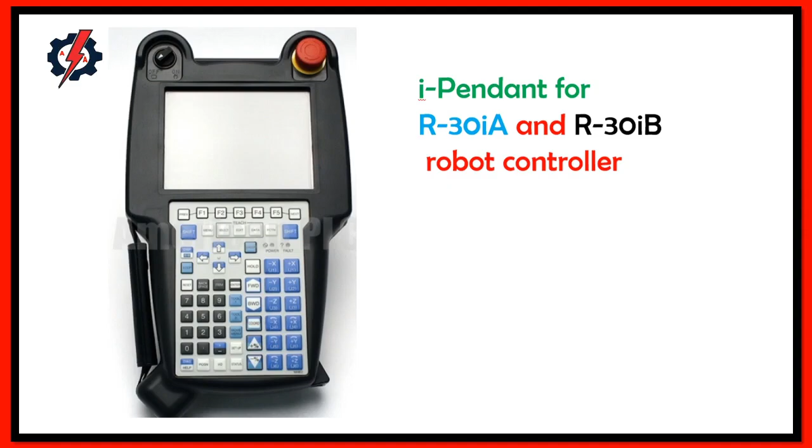This is the teach pendant or i-Pendant of R-30iA and R-30iB robot controller of Fanuc. Comfortable three-way Deadman switch.

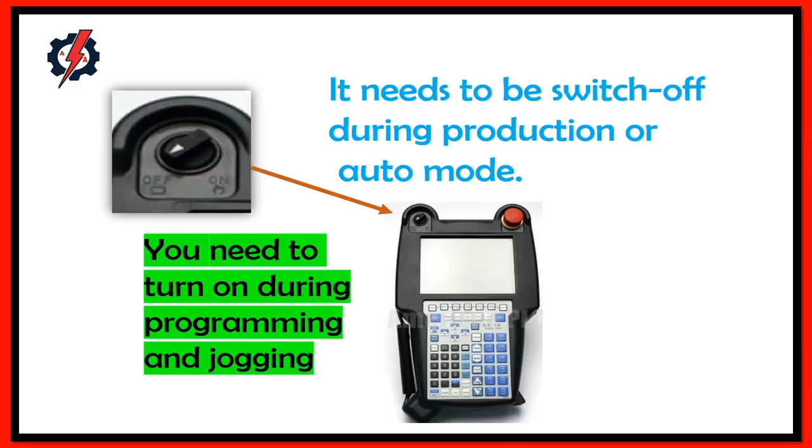It needs to be switched off during production or auto mode. You need to turn it on during programming and jogging. We have two e-stops built in, one in the controller and one in the teach pendant.

Two LED indications for fault and power. A fault has occurred and needs to be reset before you can run the program. Fault shows on the controller when powered on.

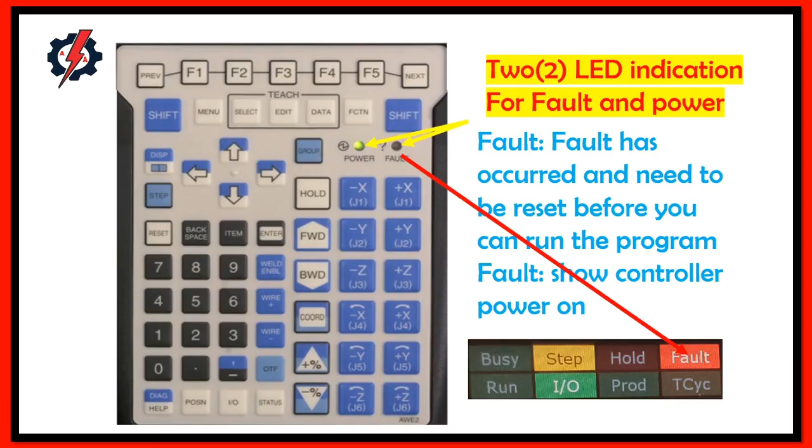Status indicator, for example, Deadman switch release, motion information, forward and joint, and speed override.

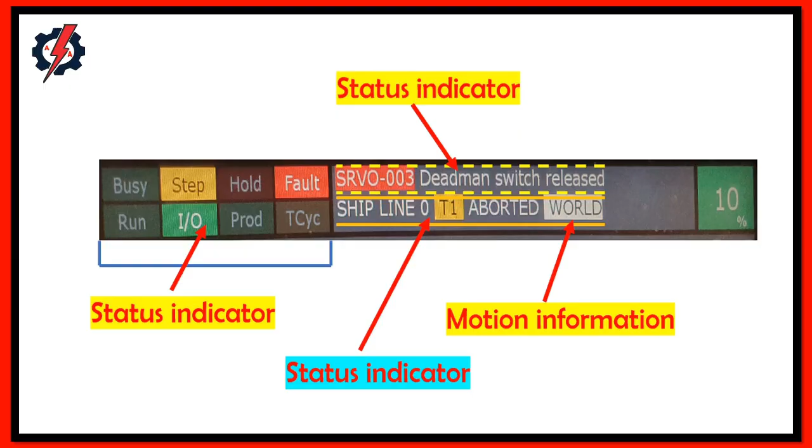We have a built-in USB port for backup and restore at the side of the teach pendant.

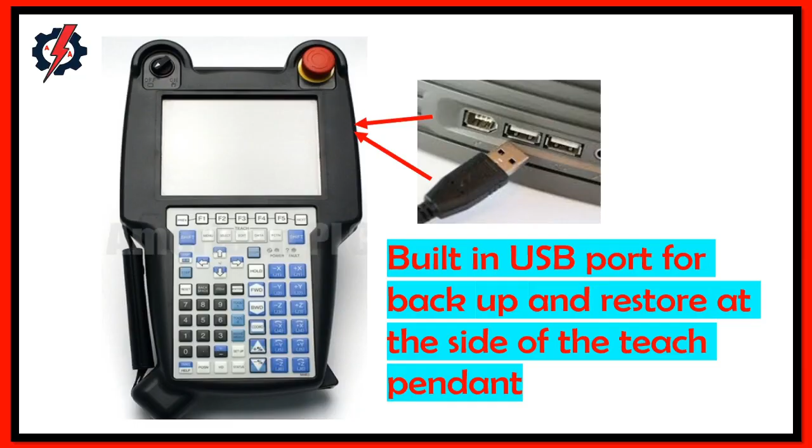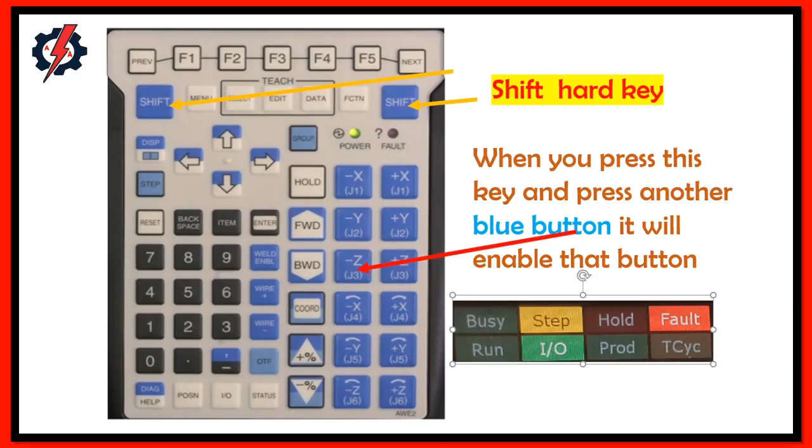Shift hard key. When you press this key and press another blue button, it will enable that button.

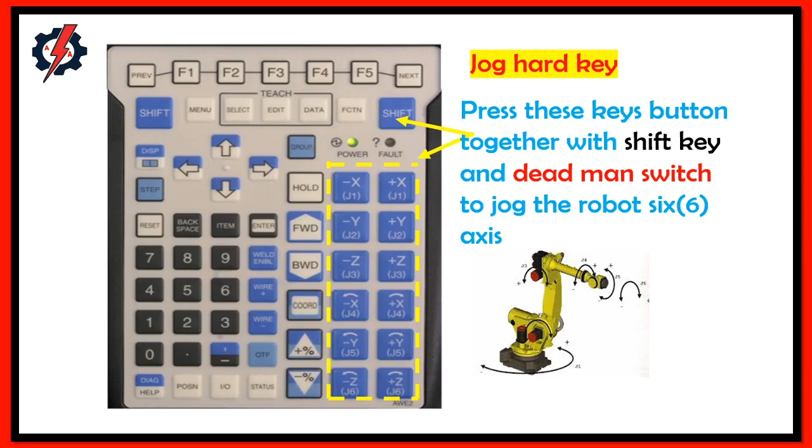Jog hard key. Press this key button together with the shift key and Deadman switch to jog the robot's 6 axes.

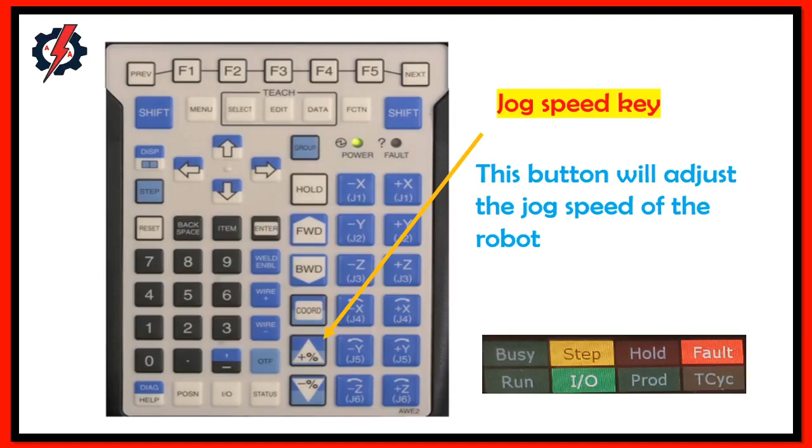Enable key for welding. This button will enable or disable the process.

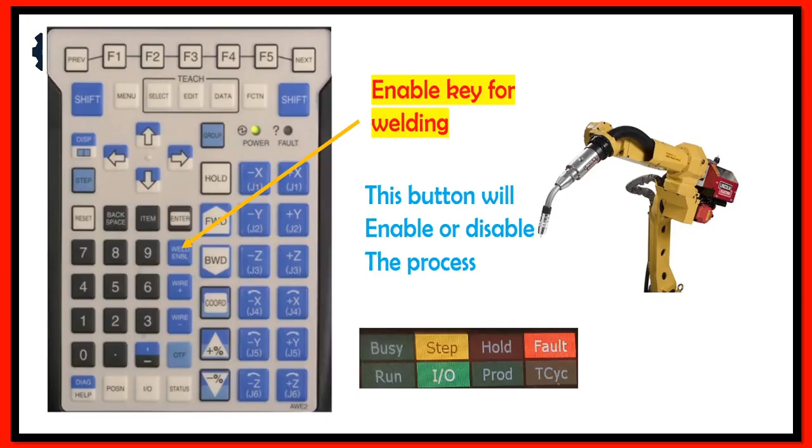Wire jog keypad. Wire feeding in and out of the nozzle.

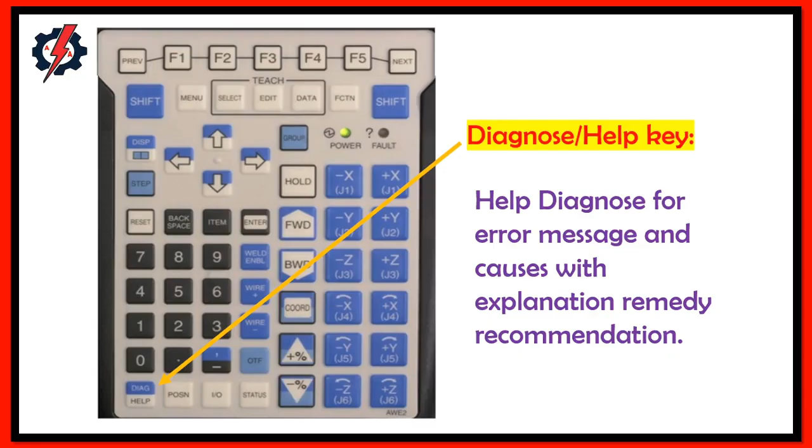Diagnostic help key. Help diagnostic for error messages and causes with explanation, remedy, and recommendation.

Display hard key. Press this tab together with the shift key to change from single to double or triple frames with extended status.

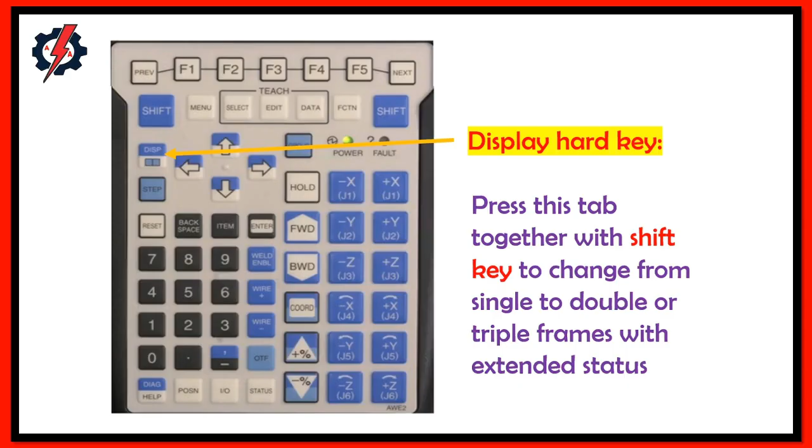Coord or coordinate key. Use this tab to select which motion instructions you want to use: X, Y, and Z, world, jog frame, or user frame, joint coordinate system, or tool coordinate system.

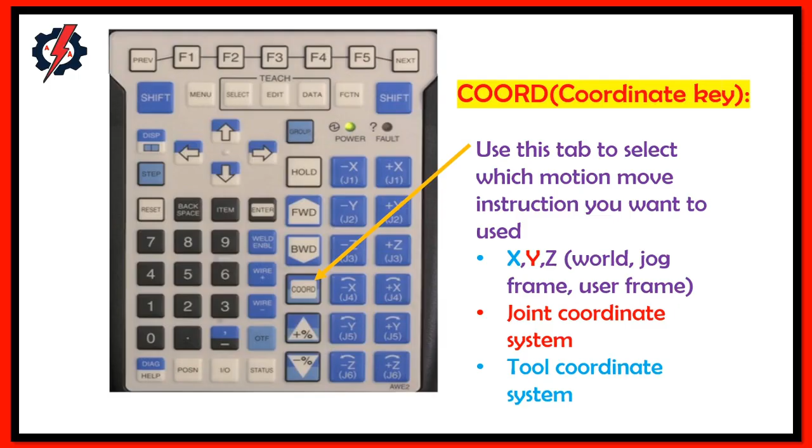Status hard key. Press this key to display welding status, showing real and actual voltage of welding and speed of feeding the wire.

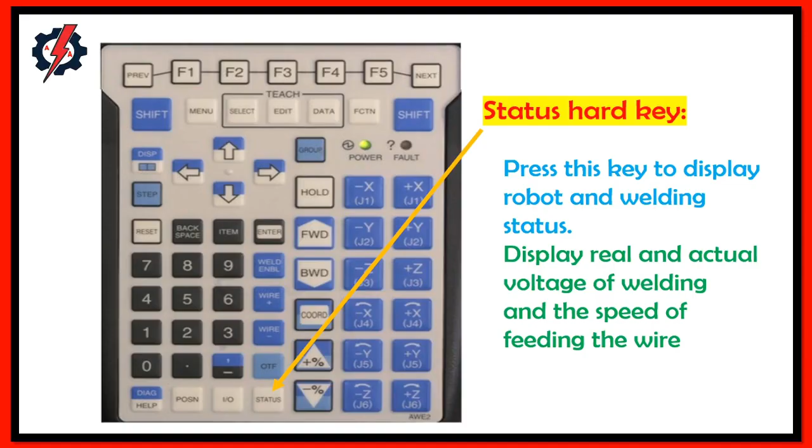OTF hard key. Use this key for on-the-fly welding to adjust parameters.

Input and output key. Use this key to display input and output of the robot controller.

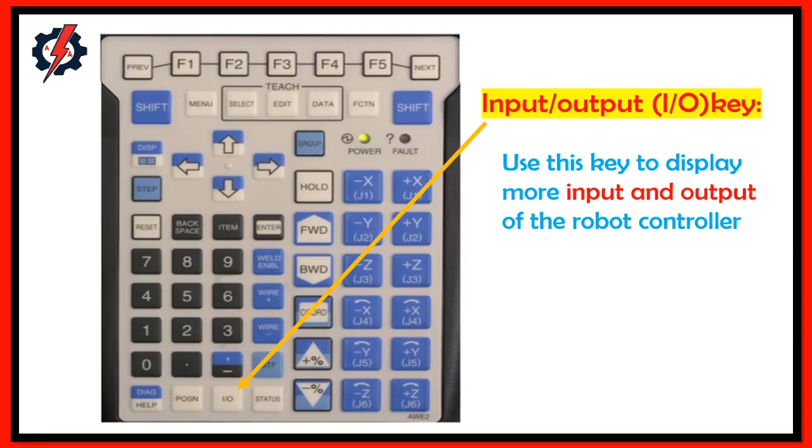The item hard key moves the cursor to a line whose number is specified. For instance, select a line on the teach pendant, press the item key, press the line number, and enter.

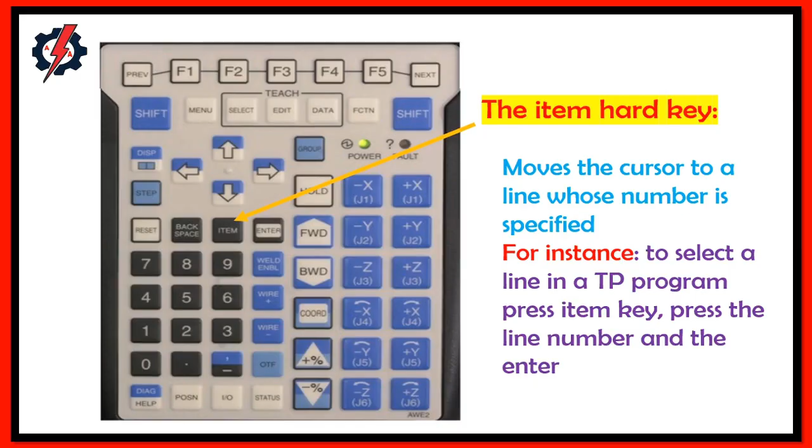The backspace hard key deletes the character or numerical value immediately before the cursor.

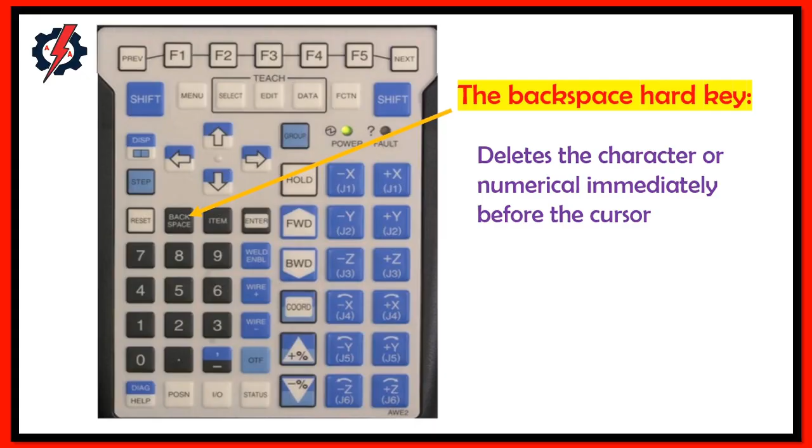Previous hard key restores the latest activity and displays the previous screen.

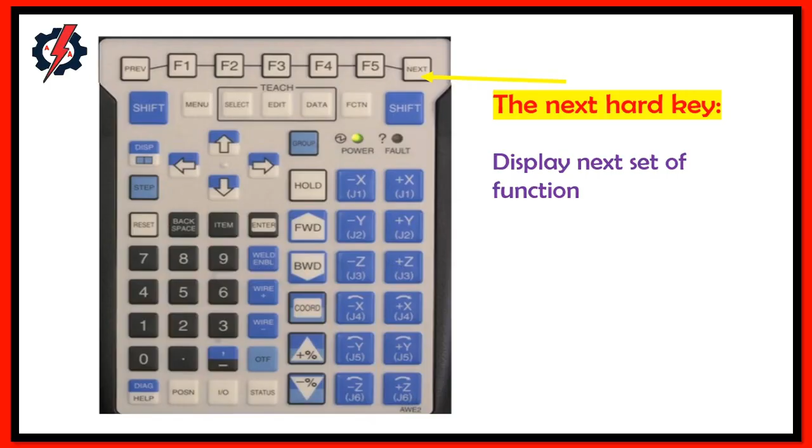The next hard key displays the next set of functions. Menu hard key. Use this key to display the menu screen.

The following list of screens are: Utilities, Test Cycle, Manual Function, Alarm, Input-Output, Setup, File, User, Select, Edit, Data, and Status.

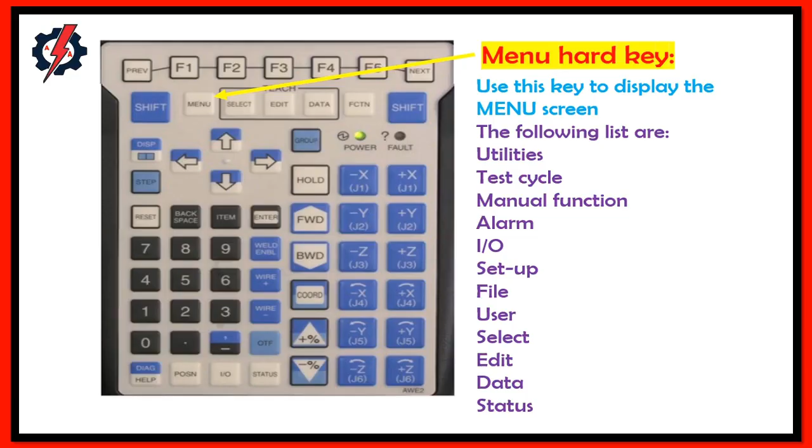Function hard key. Use this key for supplemental commands.

Examples: abort all, change group, disable forward and backward, change group, release wait, toggle coordinate jog, quick and full menu, save, print screen, unsimulate all input-output, cycle power, enable HMI menu, diagnostic log.

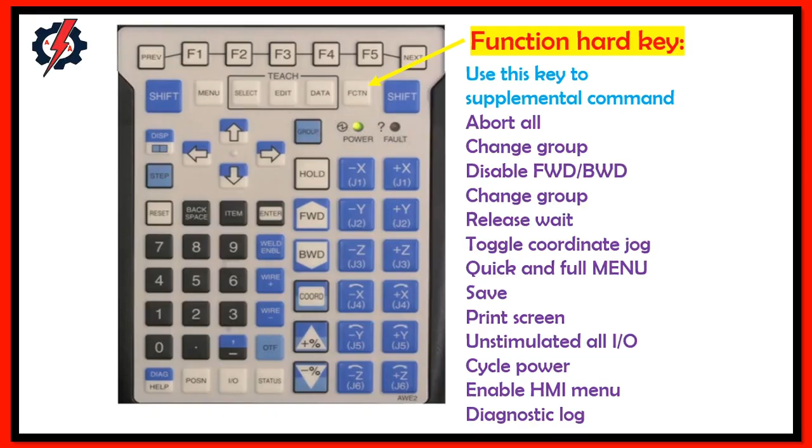Group hard key. Toggle the pendant between different motion groups.

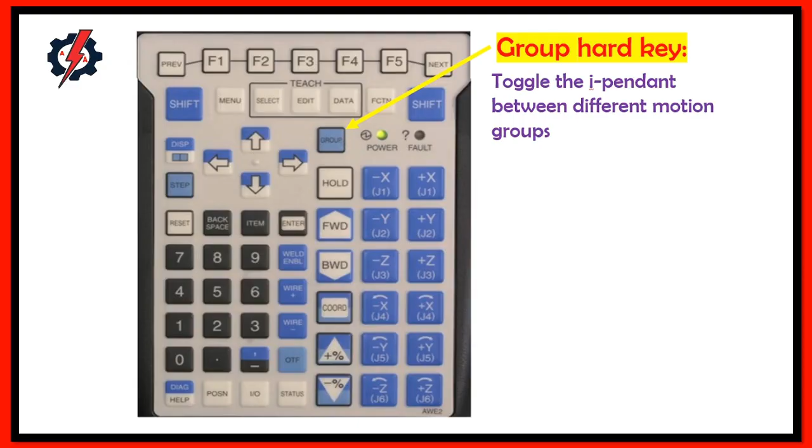Forward hard key. In production mode, use this key to start the program of the robot; in step mode, use this key for program statement execution.

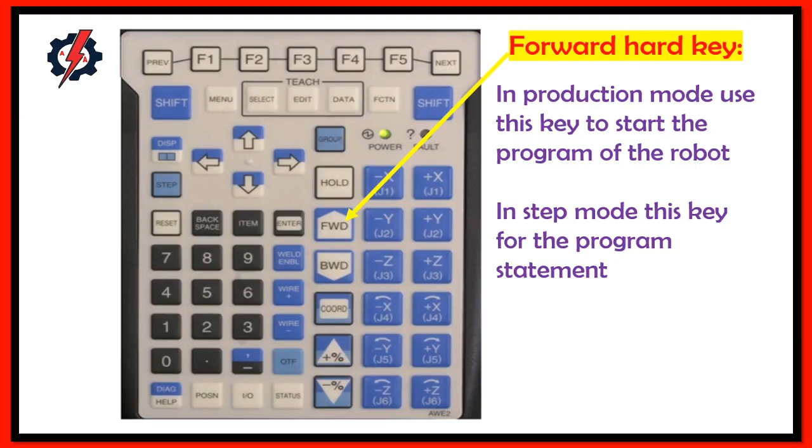Backward hard key. Use this key to execute the previous program. Hold hard key. Use this key to halt or stop the program.

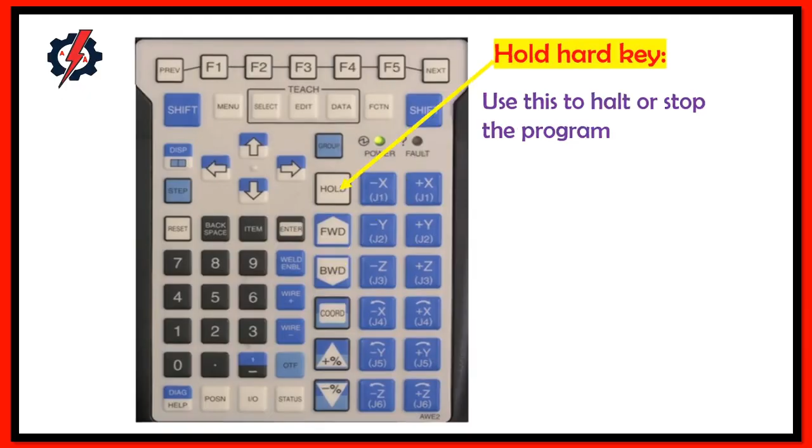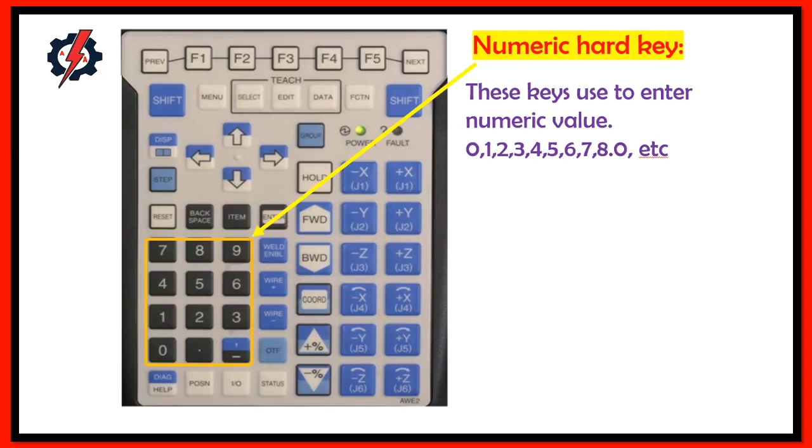Numeric hard keys. These keys are used to enter numeric values 0 through 9, etc.

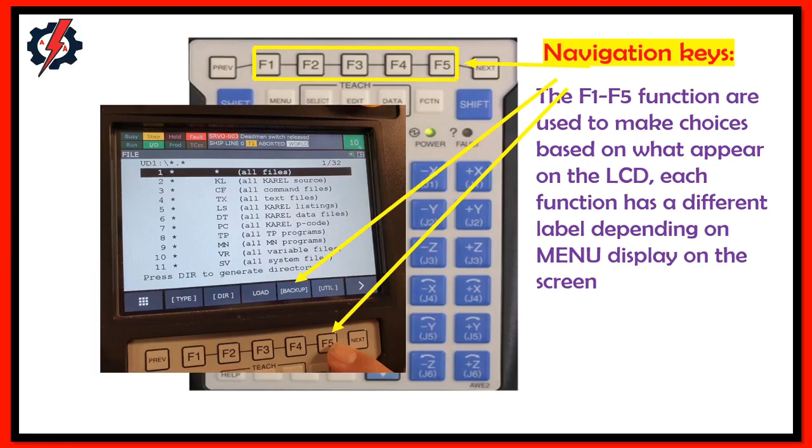Navigation keys. The F1 through F5 functions are used to make choices based on what appears on the LCD. Each function has a different label depending on the menu displayed on the screen.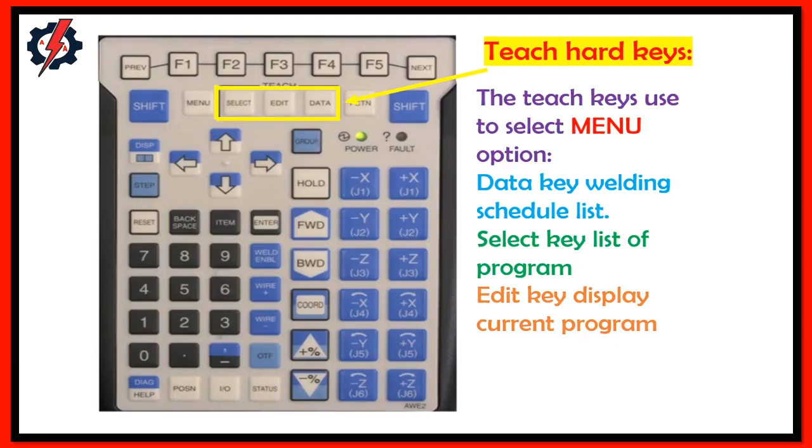Teach hard keys. The teach hard keys are used to select menu, data, welding schedule list, edit key, and display the current program.

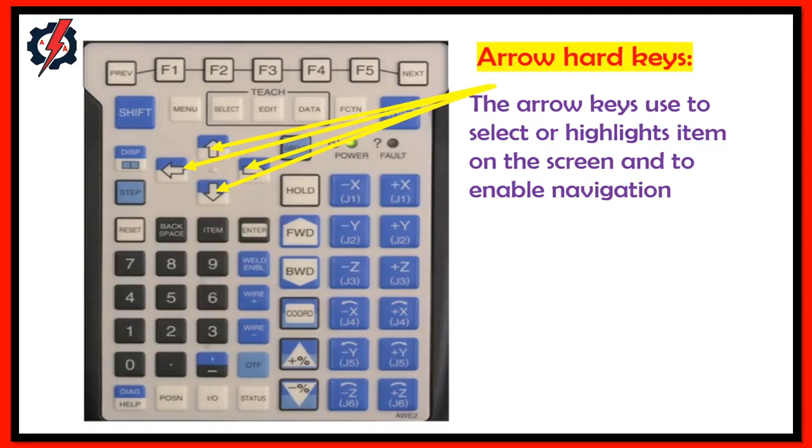Arrow hard keys. The arrow hard keys are used to select or highlight items on the screen and to enable navigation.

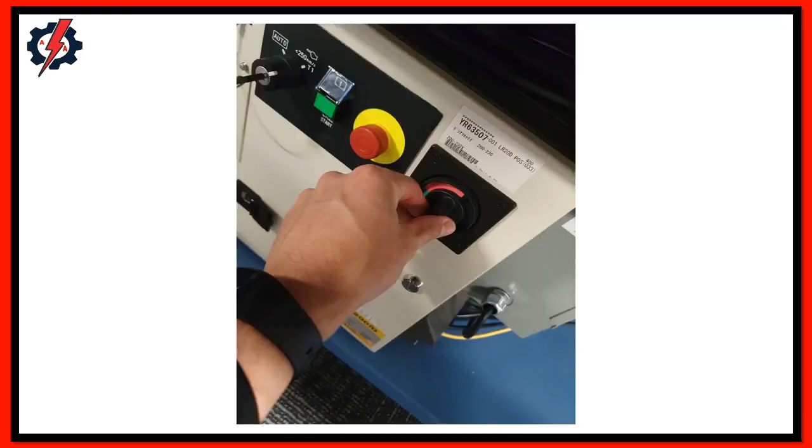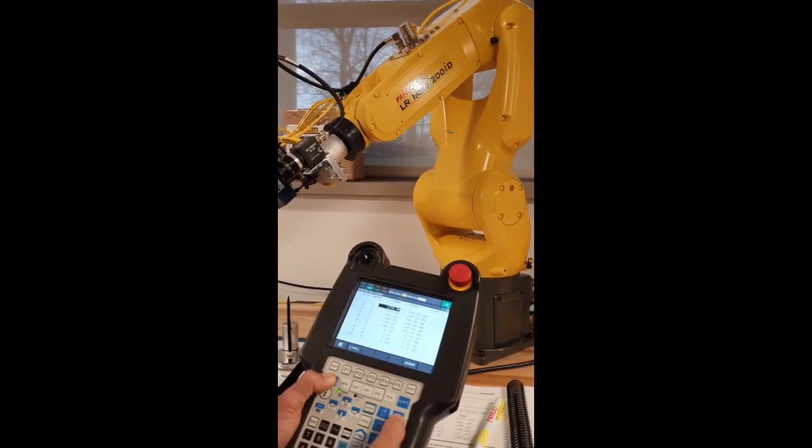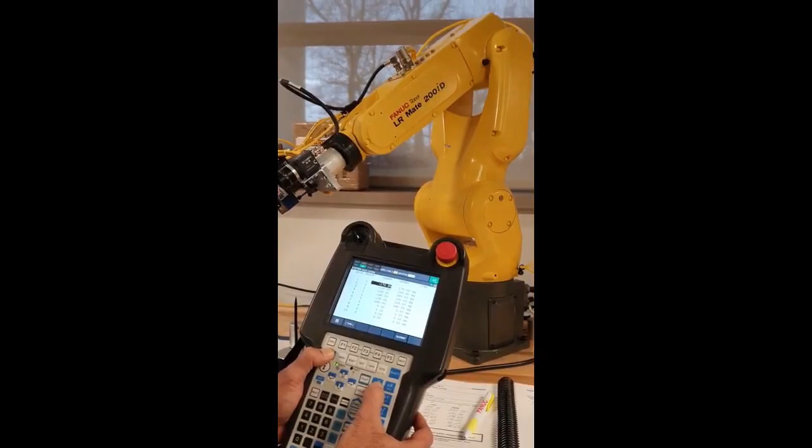Demonstrating jog motion: moving X positive, X negative, Y positive, Y negative, Z negative, and Z positive.

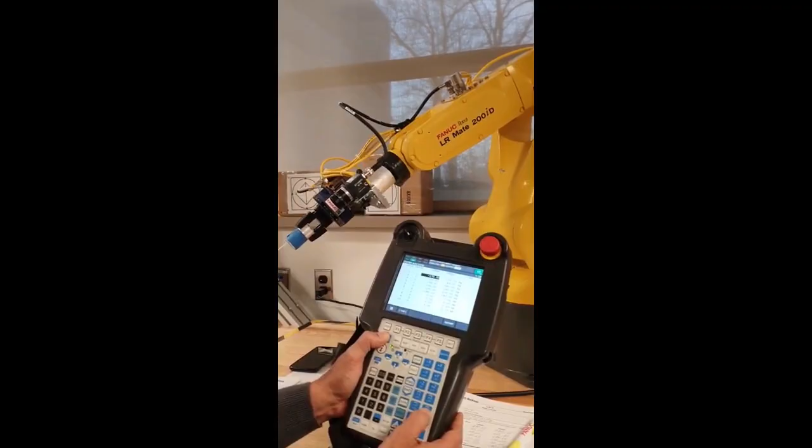Demonstrating joint motion: moving J4, joint number 4, axis number 4 positive, axis 5 negative, joint 5 positive, joint 6 negative, and joint 6 positive.